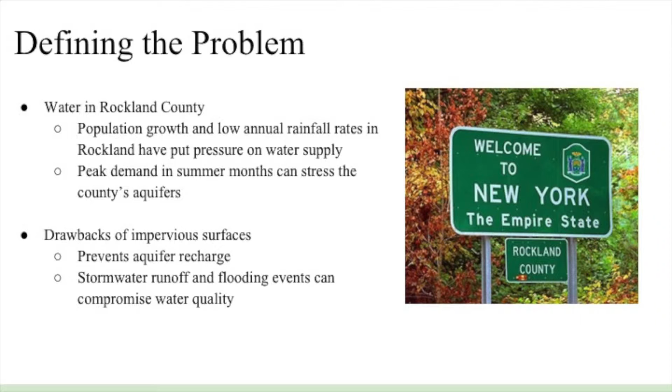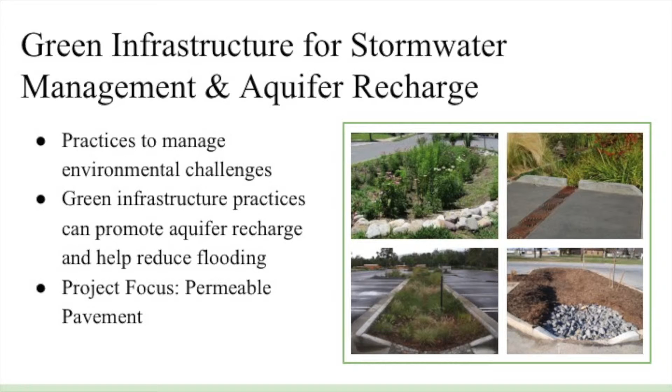Great. So before we talk about our project specifically, we did want to give a quick introduction to what green infrastructure is. So some of the more well-known types of green infrastructure are green roofs. But when it comes to stormwater management and aquifer recharge, some of the different green infrastructure you can find, which you'll see in this picture right here, are trenches, bioswales, rain gardens, and these specific ones work to synergize both physical infrastructure and plant life. But specifically for Rockland County, we were looking at permeable pavement and the ways in which they can implement it all throughout the county.

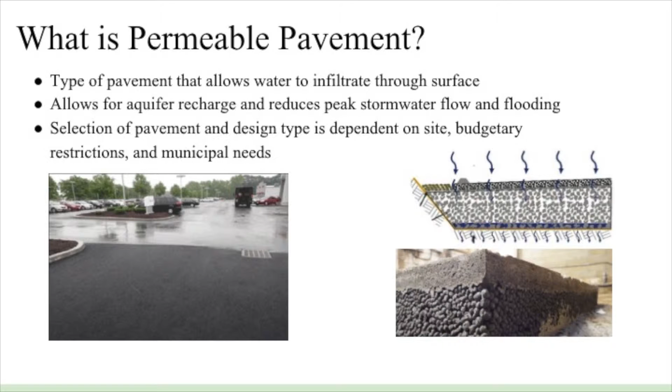So quickly, permeable pavement specifically, it's different from your traditional pavement because it does allow water to infiltrate. And so that allows for aquifer recharge, like Emily had said, and stormwater management. So the way that you go about implementing permeable pavement really does depend on a lot of different design criteria, and is dependent on the site, some of the budgetary constraints, and then municipal needs.

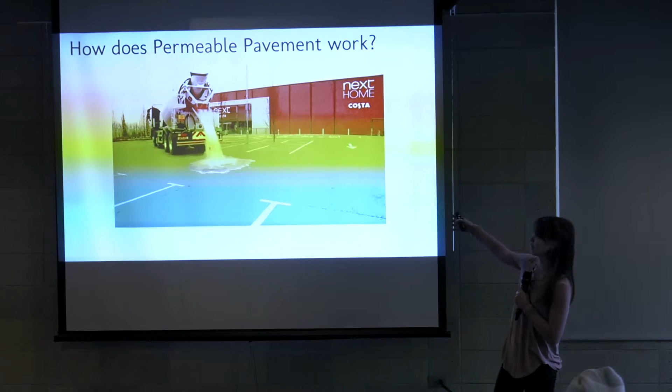So this is just a cool video to show how permeable pavement works, and it's actually pretty incredible. You see just how much water is being put into this parking lot, and rather than it becoming runoff and flooding the entire parking lot, it's actually percolating down beneath the parking lot.

So we had 4 main components to our project. The first was compiling a list of recommendations for pervious pavement, and this is for site selections. So these were the different criteria, which we'll go over in the next slide. We also created an overview of the regulatory framework and permits. And then we also did a cost-benefit report of potential funding and grant sources. And last, we created an educational pamphlet for municipal leaders.

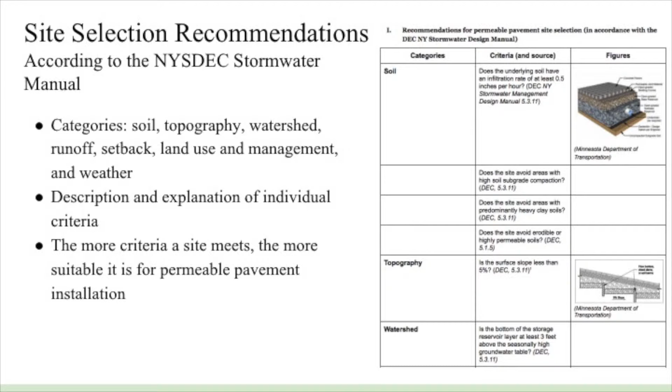And we also added different graphics on the side so you can see the different structures and what they look like. So the more criteria that the sites meet, the better. However, they are recommendations, so if they do not, the engineer must state an alternative design and risk mitigation measures, so to basically say how they're working around these issues.

So looking at some of the different recommendations that we compiled based off of our literature review and specifically the Stormwater Manual, we looked at different sites within Rockland, so just looking at the entire county, and based on some of the research that we did, some of the most suitable installation projects could be in commuter shopping malls and school parking lots, as well as in park pathways.

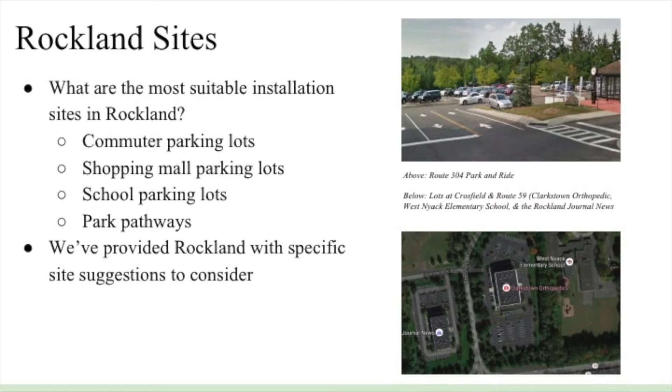So I'm just going to go over a brief overview of the permits and regulations that we found. So we researched and compiled a list and also gave them a step-by-step process. But the main relevant permit is the SPDES general permit for stormwater discharges. And this applies for areas over 1 acre, and most of these areas that we're going to be implementing green infrastructure, particularly permeable pavement, are not going to be so large.

However, the municipality retains the right and the ability to decrease the size for which the permit applies, and therefore they can be stricter in their regulations. They also have to create a stormwater pollution prevention plan, which includes different things like a description of the site, possible pollutants and control measures, and that's just another way of regulating the installation of this.

So as much as permits and regulations can seem like a barrier to implementing these things, it's also really important to keep just an oversight of the construction and make sure that they're not compromising water quality standards. So aside from one of the barriers, which she had just said was permit and regulations, our client also expressed concern with trying to find financing and grant opportunities related to basically implementing permeable pavement.

So one of our main deliverables too at this point was a compilation of different grants and financing options. And so we gave them a list of recommendations, both federal and state grants, and then recommended that within those different types of grants that they not only apply to stormwater management, but also to climate preparedness, environmental education, and water quality grants as well.

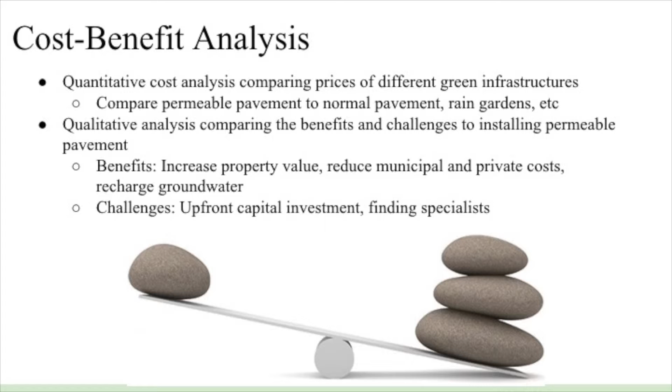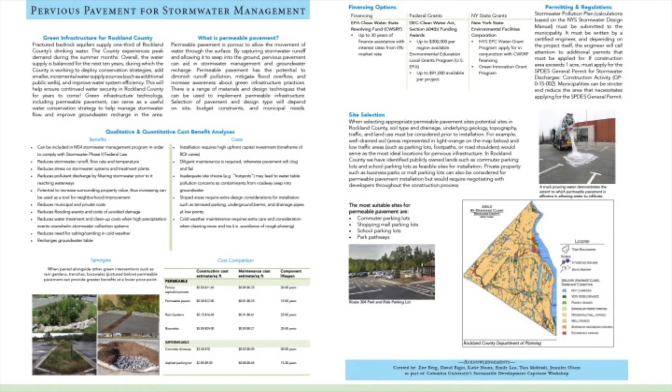So in conclusion, green infrastructure can really aid Rockland with stormwater management and their issues with aquifer recharge, but there are some key considerations to just always have in mind. So the first is site selection, because that really affects how the permeable pavement works. Maintenance is totally required because without that, it will just shorten the life of the pavement and also its efficacy. And getting the permits is really important to make sure that you're abiding by the laws and also making sure that you're maintaining the water quality. And obviously funding is really important to finance these projects.

So I guess the next steps as far as this project goes, we do have our final presentation to the Rockland community on December 15th, which we hope there's a good turnout. And then we'll also be working with Rockland County to disseminate some of the information in the fact sheet that we just showed you, so that the community organizers and government officials can have access to that information and know how Rockland County can potentially implement it in the future.

And then also there's hoping for next steps either for future collaboration with Columbia, the Columbia Capstone, how the Rockland Water Task Force can stay involved either with us individually or just more further with the institution.

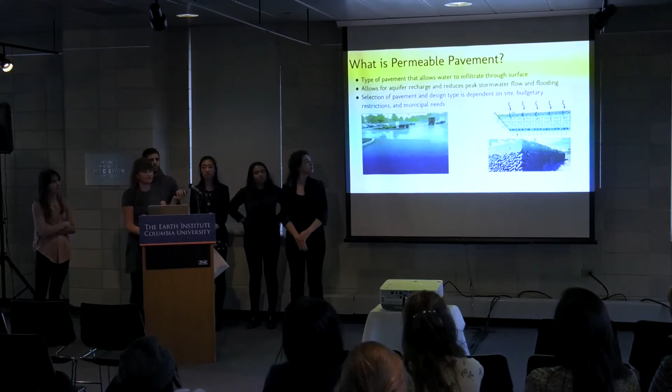Whereas normal pavement, this actually shows it too, the top part here is not as porous, and it doesn't have this very porous material beneath it. So that's how the permeable pavement soaks it all up.

There are different kinds as well. You don't just have to use pavement, which paves the whole area. You can use pavers or little cobblestone tiles, and those come in the kind where the tiles themselves aren't permeable, but the gaps between them are designed to let all the water go through the gaps. Or you can get pavers where the pavers themselves are also absorbent. There's a lot of different ways to do it, and depending on the site where you're installing it, you can decide. And the second part of your question was about salt?

Sorry. So could you repeat the question? It was just, I should talk into this.

The question was about, we mentioned that permeable pavement requires less salt in the winter. And the reason actually relates back to this porous design: it's harder for ice to form on a surface like this. And I guess the concern is that one of the things that makes permeable pavement effective is those pores, and when you're salting the roads, you run the risk of clogging up all those gaps.